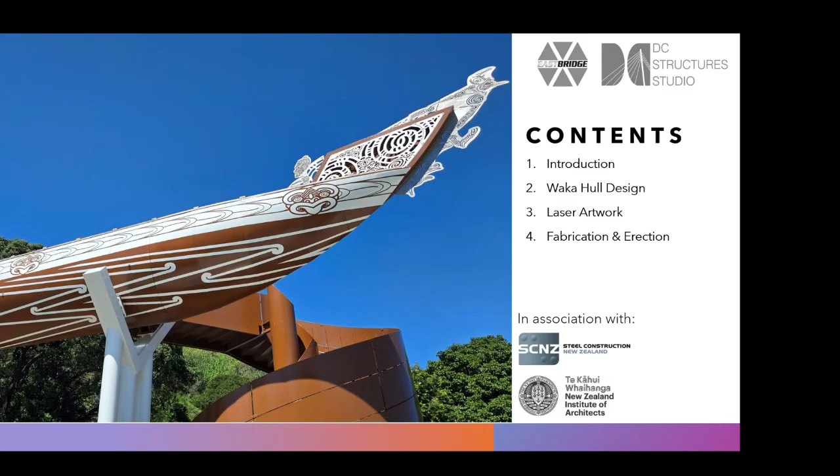And then we'll do a deep dive on some of the laser artwork and how that was accomplished, some of the challenges, some of the lessons learned so that you can use it in your own projects to advance what you're doing. And then we're going to focus on the fabrication and erection, which is a kind of behind the scenes, pulling the curtain back to see how these bridges are actually built, fabricated and assembled.

The client for this was Gisborne District Council. The iwi was Ngāti Oneone. The bridge designer was ourselves, DC Structures Studio. Constructor was Curries Construction, and steel fabrication was Eastbridge. Geotech was Riley Consultants, and we had independent peer review on the structural stuff by Hoffcon.

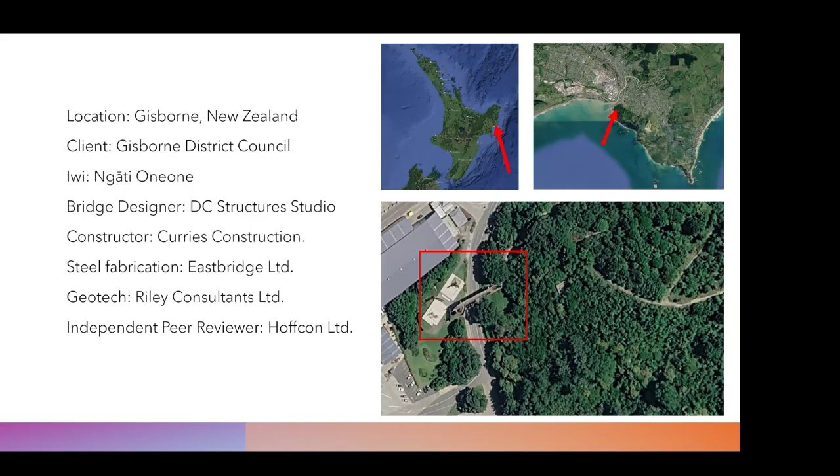So in general, the bridge location is Puhi Kai Iti Cook Landing, which we like to call the whale tail area. It's a beautiful landscape works right by the Captain Cook Monument. The project forms part of the Gisborne District Council's Tairāwhiti Navigation project, and it's a harbour frontage, so partially coastal marine. So that affected some of the corrosion considerations. As you can see, it's a very striking form.

One of the things we did very early on is engage with iwi and ask what kind of bridge they wanted. And they were very clear. They said the bridge needs to look like a waka. We don't want it to be symbolic of a waka. We don't want it to imply a waka. It needs to look and feel like a waka. Okay, so it was quite nice to get that very direct feedback. And I think they'd obviously had previous concepts that picked up some key themes of the waka, but played with it too much, and it wasn't quite what they wanted. They wanted something very literal.

As the architecture and structural team, we were very keen very early on that the best way to give integrity to that cultural identity would be to make sure that the waka itself becomes structural. We were very clear day one, we would not create a traditional bridge and clad it to look like a waka. This bridge is fully structural. You'll see in some of the later slides, it behaves like a traditional boat building form. Everything you see there, although it's the architectural outcome, is also the structural form.

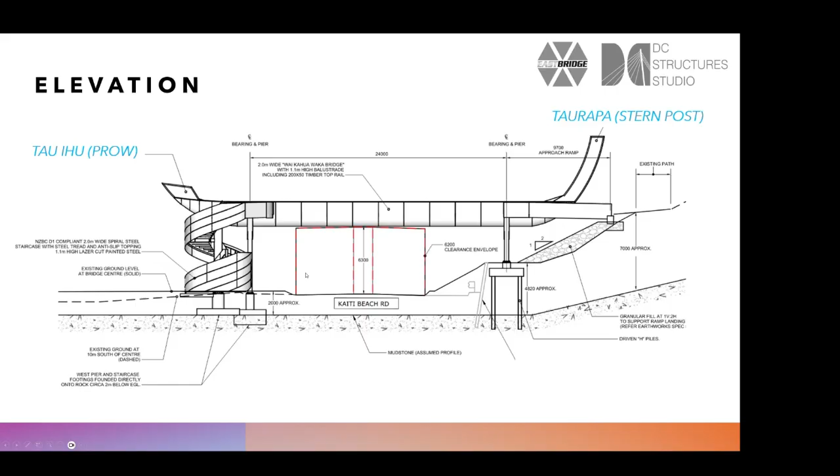Here's one of our favorite views. So in simple terms, this is a 36-meter long bridge. It's funny, it's difficult to measure the length because it tapers so much, but it is about 36 meters and the main span's 24. We've got a 2-meter usable width. So that's the width between the balustrades. It has a curved box girder main span, spiral staircase, and then we've got, just in the foreground here, this northern approach ramp that links us back to existing ground and those dock pathways.

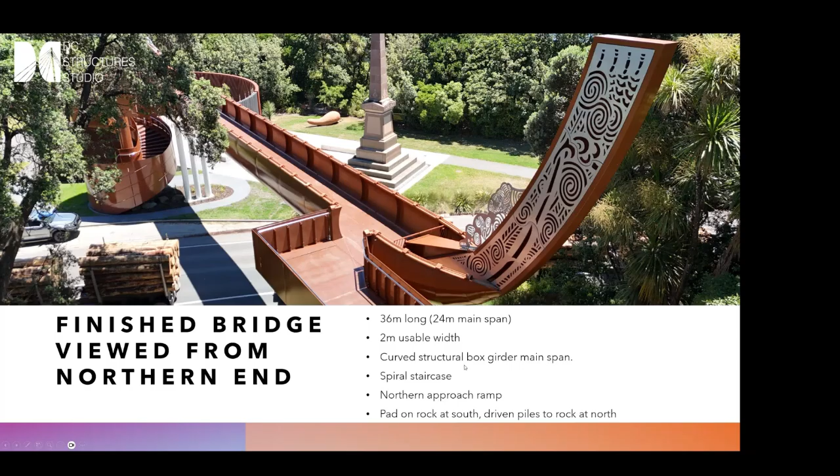So the waka hull design. So I want to focus on this because this is one of the core elements of this design, is that integration of the architectural intent with the structure, with the fabrication. So we're going to focus a little bit on the hull.

So like I say, early on, we decided we weren't going to clad a steel I-girder to look like a waka. We felt that that was creating almost a theme park ride from something that had very high structural significance. So we wanted to maintain the integrity of the intent with the integrity of the design approach.

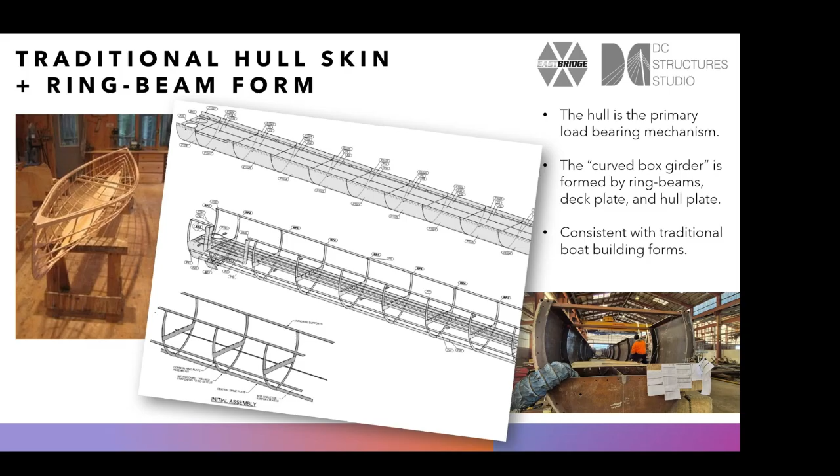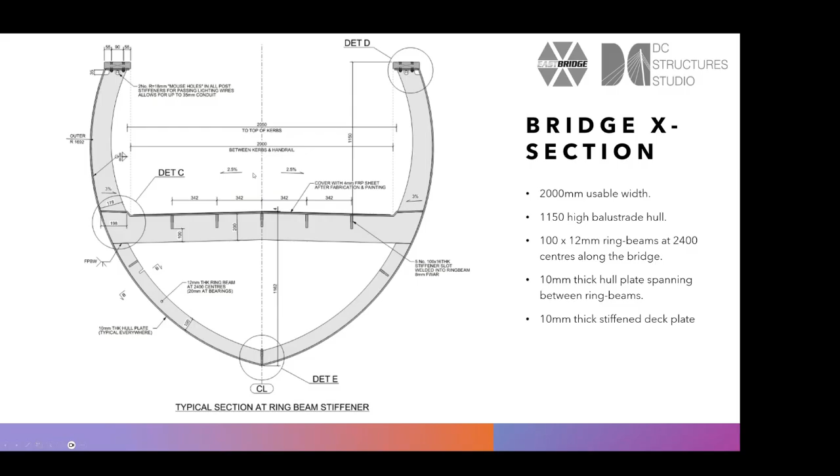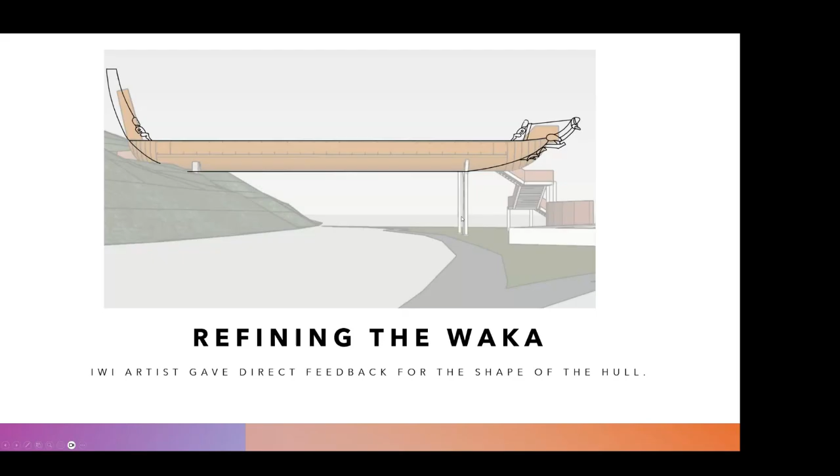So you can see it was quite a flat nose and stern, whereas now we've lengthened that tapering. It adds a lot more elegance. We obviously elongated and curved the stern board, and the prow became much higher in technical complexity, but that's part of the outcome. So working and throwing ideas back and forth with the iwi artist was really important to make sure we maintained iwi buy-in to the final outcome.

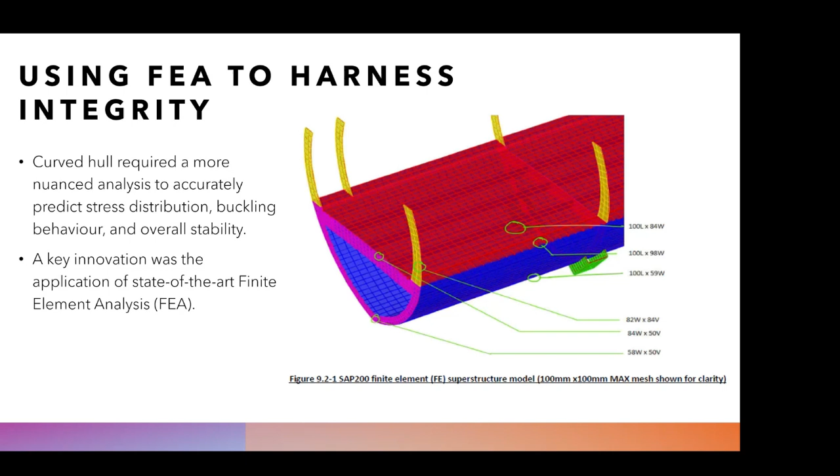What we didn't want to do is dilute the waka form to fit with a consistent box girder form. We wanted to make sure that we could take the box girder and match it to the waka. So it was the architectural intent and the cultural identity that drove the analysis, not the other way around. Here's just an example of that in action. So here we're running probably live loads on the deck, and it shows us the magnitude of stresses we get. And this in turn enables us to identify where we do and do not need stiffeners. This is quite an interesting approach, really cool, quite technical.

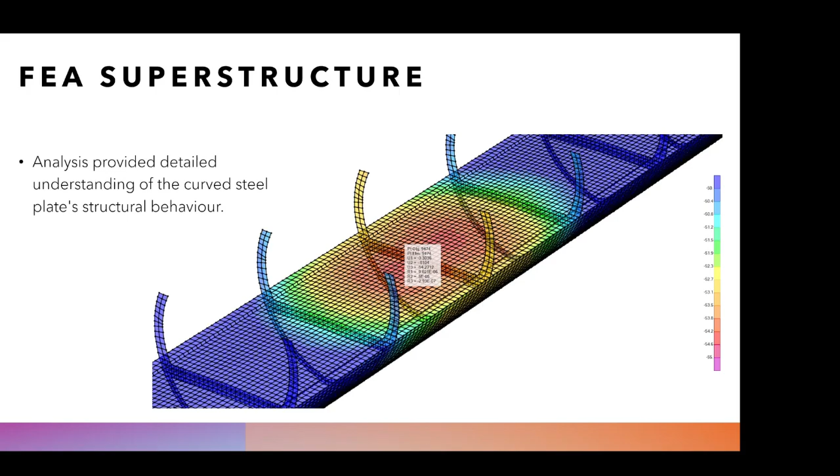We also did a dedicated one for the prow and stern areas. We had to do quite a big focus on the full-body constraints of how everything fits together so it behaves as it would behave. One of the key things with the prow and stern is we have a PFC, a parallel flange channel, running all the way around these board elements to give it stiffness and support. And you'll see in some of the later slides how that's quite important for the detailing.

But you can see some pretty sophisticated models, and this isn't actually the sophisticated version. I've printed this out at the 200 by 200 because it's the only one that can show you the squares. When we go down to the finer meshes, it's just a myriad of points.

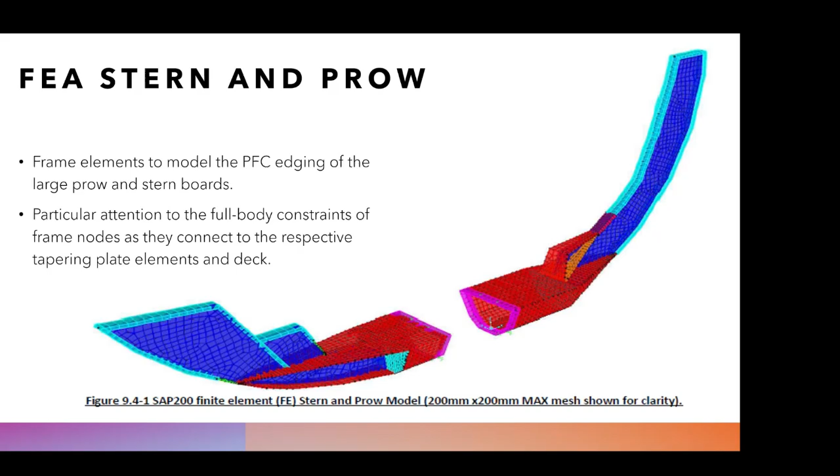So we ran numerous different versions to kind of understand the sensitivity of some of the assumptions we make, but quite fundamental to the outcome. Everything is focused on making sure the waka and its kind of architectural and cultural intent drive the structural. And it also comes on later, and you'll see in the fabrication as well.

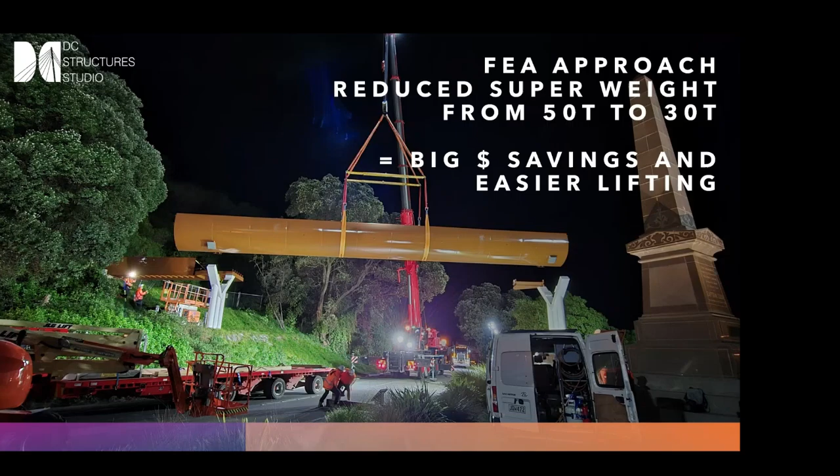Right, yeah. So the FEA approach, not only did it allow us to do something quite innovative and make sure we got the form we wanted, it allowed us to be very tuned on materials. So we originally, in pricing this works as a D&C, it was priced based on comparative detailing to other box girder structures around New Zealand. In that scenario, it should have been around 50 tons. Now, with the complex FEA, we got it down to 30 tons.

So that's a significant saving in cost, weight, materials for sustainability, but it also made the whole lifting operation that much easier. So, sophisticated analyses does add time, but if you can harness it and drive it for the right reasons, you can also get very good value. So we've got value here in terms of sustainability, material. We've got value in terms of cost savings, lifting, and also the architectural intent.

Okay, how am I doing for time?

Pretty good. So we'll move on to the laser artwork detailing. This is probably something you all come across on a more day-to-day basis. So obviously a big part of what makes the waka an interesting cultural element is the attention to detailing, particularly around the prow and the stern boards. When you look at wakas, that's where a lot of the care and the craft has been applied in that kind of detailing to show and tell the stories. So this was our primary focus here.

Now, as you can see in this image here, we've got laser cut patterns to the board area, plus around the perimeters, and there's this tiki that sits on the face of the prow board. One of the things that was really important to the overall direction of this project was understanding the assembly and constructability of these elements, trying to integrate discrete fixings. We also had to work quite closely with the lighting integration and also structural assessment.

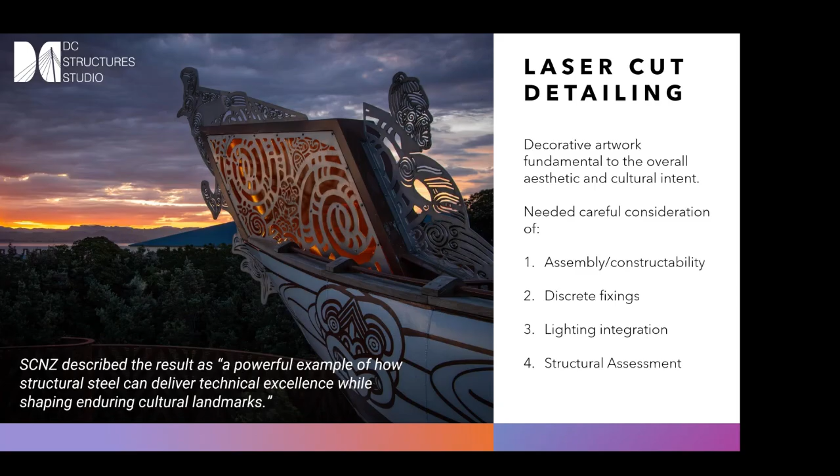So in the early days, we developed a 3D model. One of the important things we did here is we put placeholders in for the artwork. What that allowed us to do was run the overall bridge design in parallel with the artwork design, so that we weren't rushed or forced to expedite the process. We could take our time and get it carefully crafted, knowing it would fit to these kind of placeholder templates. That was quite a key decision because it bought us time and allowed everyone a bit of freedom to work with the artworks, the laser cutting, all those complexities, and the lighting. All those elements together were quite a challenge.

So you can see here one of the details. One of the things we focused on was trying to make the artwork, so the laser cutting, as simple as possible. So in practical terms, it's just a 6mm stainless steel plate. There's no welded elements to it. There's nothing other than drilled holes for fixings, and it's just a flat plate put through the CNC to be cut. So working through how that attaches to the structure without having to add kind of cleats and fixings and all those other kind of processes was quite important.

So here we've got, this is kind of half of a PFC, so a parallel flange channel. This runs the perimeter of the prow board and the perimeter of the stern board. What that allows is it allows us to have this central stiffening plate, which does the structural work, but then it creates this void. What that void allows us to do is when we have the laser cutting, in daytime, it creates a beautiful negative detail. And in the nighttime, it creates an area to install the lighting. You'll see that in a second.

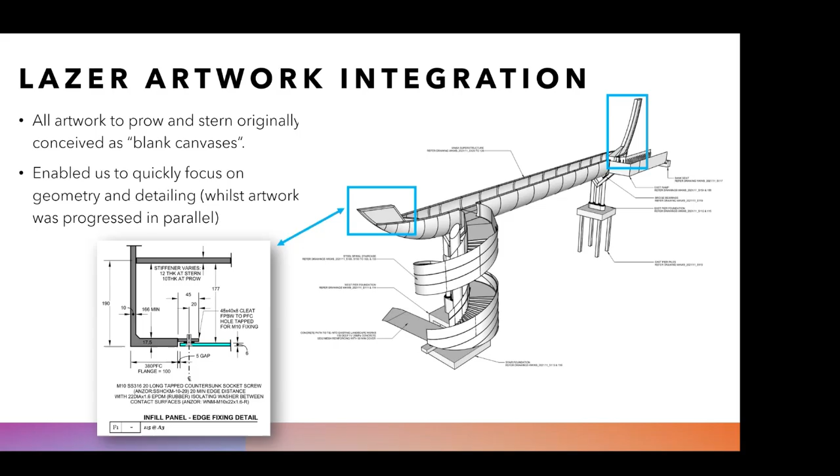And you can see here, the fixings are very simple. It's just, I think that's a stainless steel tech screw, isolated with a rubber washer, and all of the hard work is done by the structural steel. So there's a cleat to receive it. The structural steel is pushing away to create those voids, but the laser cutting is kept as simple as possible. And you'll see that in some of David's later slides, that the laser cutting was a flat panel, and that helped everything. And keeping it at 6 mil was really important.

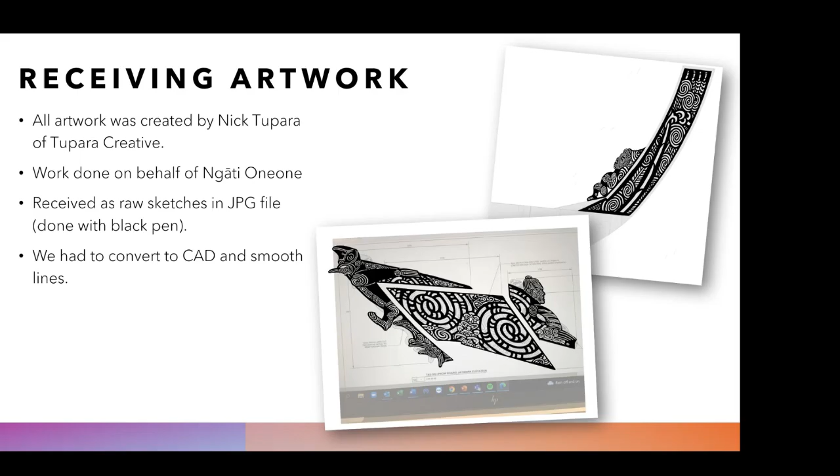Now, how did we receive the artwork? So we had those flat panels that we passed to the artist, and then the artist sketched for us what he wanted. Now, I've got to be honest, it was an actual sketch. So we tried to convert that to CAD, but the problem is it picks up all the nuances of actually a sketch detail. And you'll see that in the next slide. So when we actually created raw CAD from the sketches, we had all these crazy little bumps and curls and gnarls. So we did have to do a sanity check and go back through the CAD and just take out some of the craziest sketchy elements.

You see on the right here, there's quite a few almost sawtooths. That's literally the placement of the thick black pen that was used. And as you press down, it just creates local blotching, and it was picked up in the conversion. We didn't change all of that. So the final artwork is very much the raw sketch from the iwi artist. We just tuned some areas where those little nuances might have been a bit too overpowering.

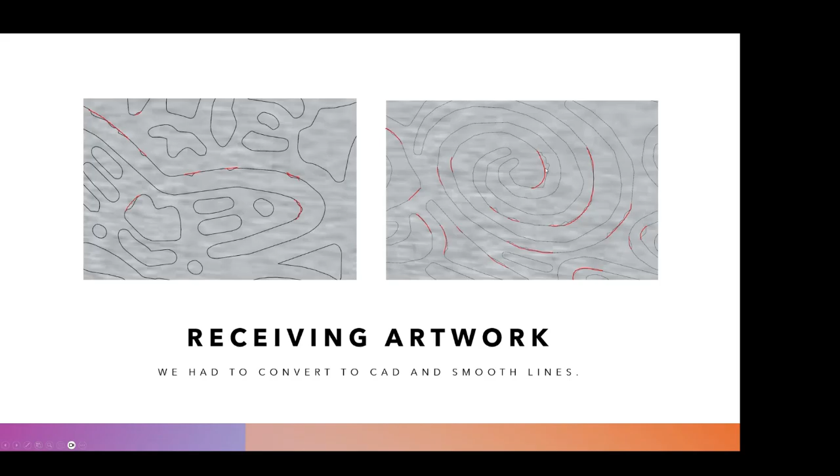Once that was done, we had a CAD file that we could then put back through our 3D modeling and put them back into those placeholders. So in the meantime, the entire bridge and the piers and the foundation, they've all been designed in parallel. But knowing in advance what those canvases were in terms of size meant once they were detailed, you could fit straight in. And you can see here, this was the intention, and you'll see in some of the later ones, it's exactly what was delivered because the process was right.

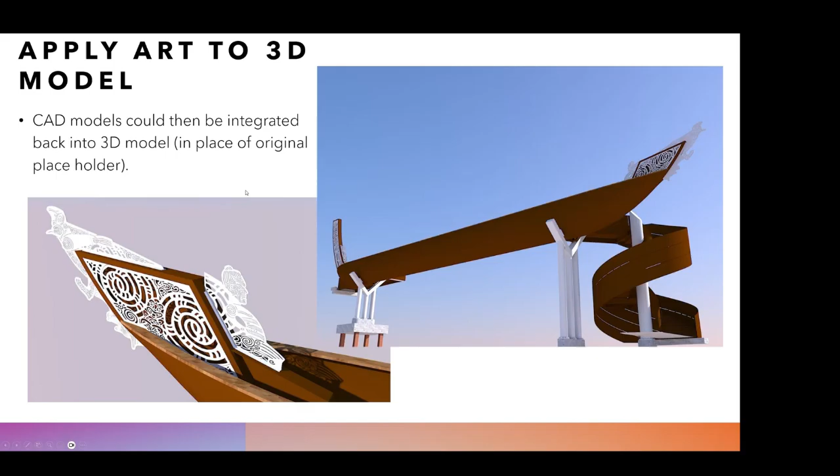One of the things obviously we struggle with, and I've talked about earlier, is wind and just people swinging on it, pushing it, feeling like they need to challenge it in the field. We've all done it. You walk up to something and sometimes you'll give it a nudge, you'll give it a push just to see what it's about. So we had to make sure that this thing was robust, but we didn't want to just chuck material at it.

So one of the processes we created is we put the artwork into CAD. We then developed a bespoke, I guess you would call it an application or an app, that took the CAD and changed it quickly into an FEA model. So it actually goes through the CAD and works out what is solid space, what is blank space, and builds a model. Okay, so you can see here, this is from our Monganui Gorge Bridge. That's the balustrade infill. But here's the tiki from the Waka Bridge that we used it on as well.

And that then goes on for us to look specifically at the areas that might be struggling. Now, obviously, with these intricate patterns, it's normally in the regions where the pattern's reducing to such an extent that it creates like a bottleneck. So you can see here, we had some areas here, but there was a particular bottleneck through here that needed analysis.

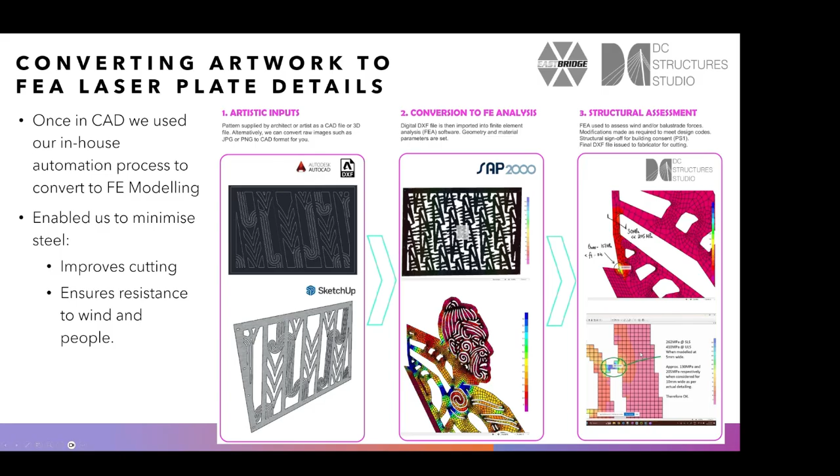And, you know, this is pretty unusual. We've got a full FEA model of the architectural tiki just to make sure it could do its job freestanding without becoming 10 mil, 12 mil plate. You know, we could keep it at the 6 mil plate because we could prove it. You don't want to find out after the fact that 6 mil is wobbly as hell. So this is where this adds value.

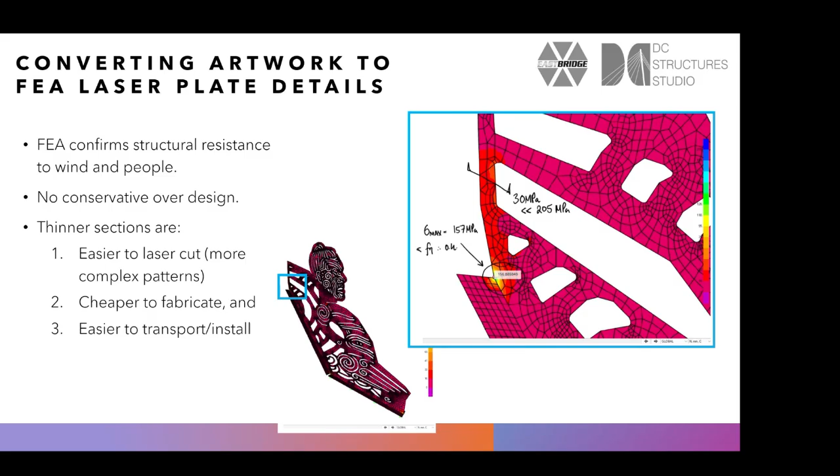It allows us to hedge our bets in terms of we can go thin plate, which, like David will talk about later, thin plate is easier to cut. Okay, by going as thin as possible with proven analysis, it opens the gateway for a nice, complex, intricate pattern that adds a lot of value.

The detailing, so you can see here, this brown kind of framing element, this is the PFC. So you can see here in the top right-hand corner, this is symmetrical, but half the PFC stands proud of this central board. So you see here the brown background, the negative detail, that's this central board. And then the framing is the PFC coming over the top with these cleats to receive the artwork.

And here, what this detail is showing is we used an INEOS Eon Flex Pro flexible LED system. That allowed us to kind of go up the inside of the PFC and get this whole area lit. Now, the flexible INEOS was more about the stern, because the stern's actually a curved shape rather than the more straight shapes of the prow.

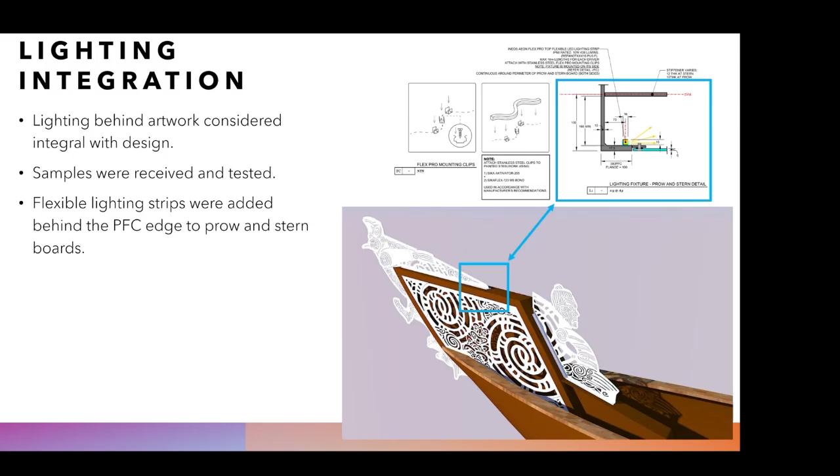But again, considering how we integrate the lighting, how we get the negative details, how we get the fixing, is really important. And that's probably one of the strongest elements of the Waka Bridge, that awareness of what we want to do architecturally, culturally, with the intent, and making sure the details are considered from an early phase so everything comes together seamlessly is quite important.

Here's a version of the lighting. So we do have under handrail lighting, more of a functional lighting, and that also comes down the staircase. And then we've got the architectural lighting to the prow and the sternboard. I mean, the sternboard is massive. It's like 8 meters tall. I think it's like 1,500 mil deep. It's huge. This probably doesn't give it the scale of its actual outcome.

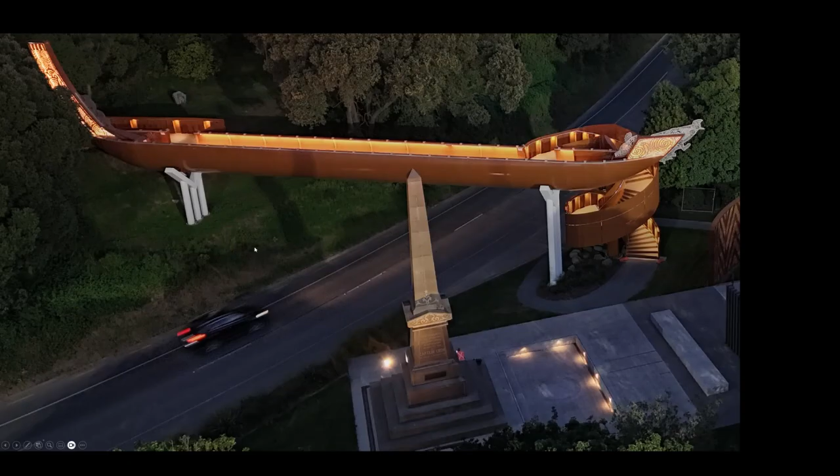But you can see that lighting has done its job. It lights all the way through that negative space. And we had quite a few mock-ups in the office, quite a few days where we had to black out all the windows and get the lighting to see if this would do the job. And obviously it did. So that's a great outcome.

Also, a really important consideration was around parts and assembly. Like I say, this overall sternboard is huge, so it wouldn't be practical to have this as one laser cut element. We had to work through, well, what are the stainless steel sheets available to us? So this is probably an important lesson to learn when you're doing detailing with this. Start from what are your sheet sizes? What can practically be sourced and supplied within New Zealand? And then work backwards, because that will define your assembly segments.

Okay, so you can see here, even on our drawings, we explain what parts and what sheets we're expecting these to be cut from. So you can see this panel number 2 was cut from a 3 by 1.5 panel, whereas number 3 was from a 2.4 by 1.2. So having awareness of available sheet sizes and then working through your assembly is really important.

We also played a little bit with the sections. Rather than having a straight cut, we created a bit of a fun shape with the cutting itself, and that added quite a lot of value. Rather than trying to hide the cut, which was almost impossible without adding complexity, we tried to create a bit of fun with it. So in terms of the panels, you've got these cut edges, and we've also got these holes. These holes are your fixing points onto those cleats I showed you earlier. So overall, this was quite a fundamental drawing. This is the stern plate detailing drawing that shows the plate assemblies and shows how they attach.

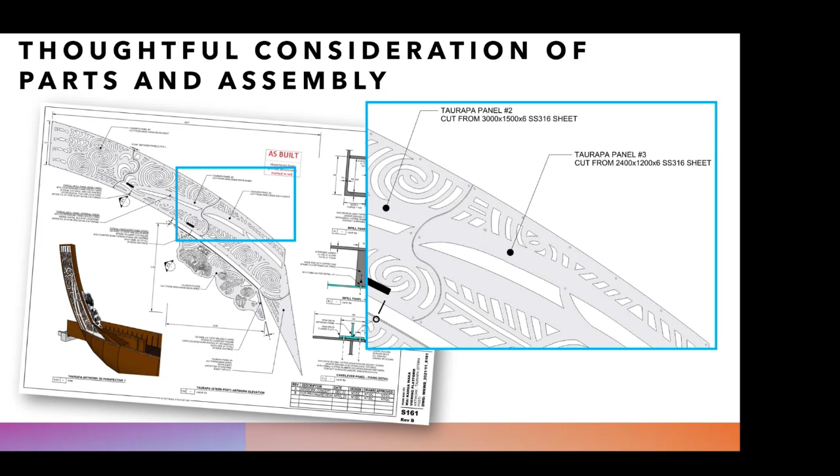And obviously the DXF file, so the raw CAD file, was then sent to the fabrication team so they can plug it straight into the CNC machine. So a very kind of smooth, quite easy process, because we all thought about the process in advance and decided what we wanted to get from the process.

It's a stainless steel mech fixing on a stainless steel plate. You have to look hard to find it. It's one of the things, once you find them, you can't not find them, but typically people don't see them. But we find the assembly cuts to be quite playful and actually a really good outcome.

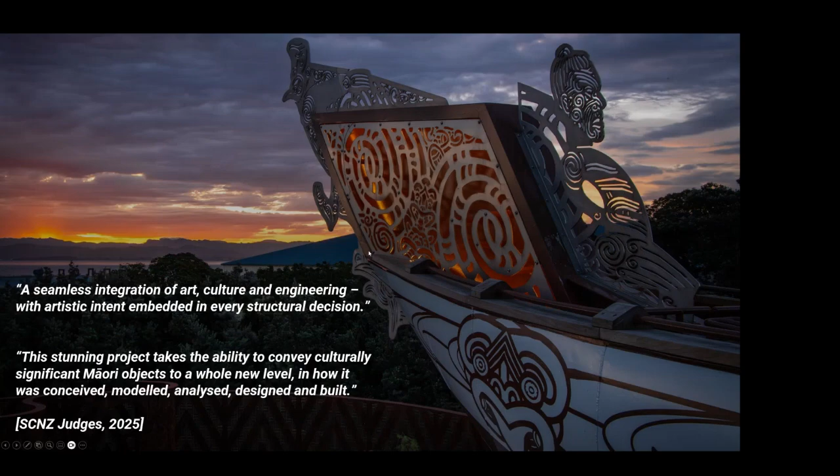Obviously, it's done well at the SCNZ Awards. Seamless integration of art, culture, and engineering, which is basically the purpose of today's meeting. The artistic intent embedded in every structural decision. And that's really the key message here, that we haven't created a bridge and then clad it to look like a waka. Everything has been woven together into one outcome. And I think if you can get that in your projects, the outcomes speak for themselves.

Okay, that's all I'm going to talk about today. I'm happy to take questions as we come on to the end of the session. I'm going to hand over to David now, who's going to talk through fabrication and erection. Yep, thanks very much for that, Dan.

Dan, to his credit, is very in tune with the requirements of the fabricator, and he's had a bit of a relationship with Eastbridge, so he's quite good at knowing what does and doesn't work from a fabrication point of view, which did make this project a lot easier.

I think one thing that I would say that facilitated this project is we had a very tight collaboration between Dan, the designer, Eastbridge, the fabricator, and another chap, Andrew Fletcher, who is our detailer. So slightly unique to this project, Eastbridge engaged both Dan and the detailer directly. So we had a very small circular relationship right from the inception of this project. So the fabricator was heavily involved. And I think it shouldn't be underestimated the benefits that added to the project.

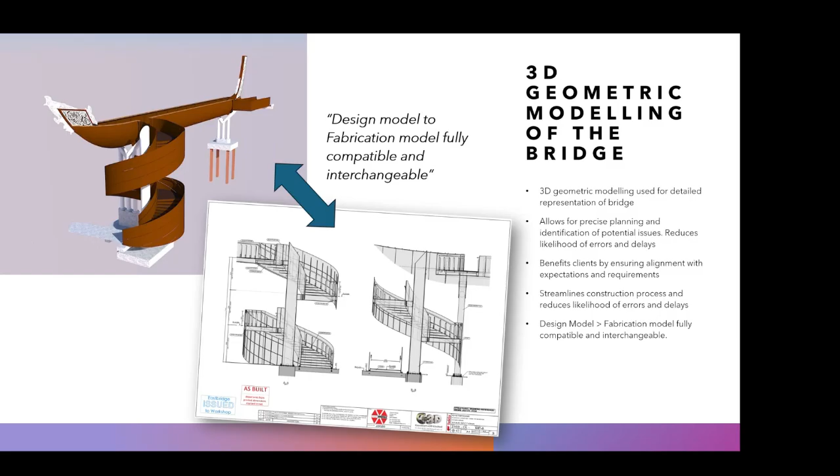And I think the main benefit, which you'll see on the next slide, thanks Dan, is that the renderings that were produced by that collaboration at the start very much have borne out in the end product. I mean, what Dan conveyed to the stakeholders is what was delivered in very tight alignment. I think that collaboration shouldn't be underestimated, and it's quite worthwhile going forward.

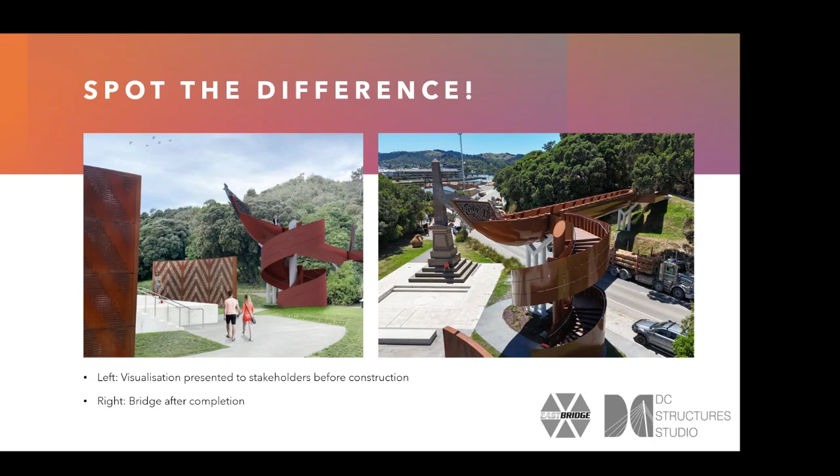Like in a usual construction arrangement, there might be 3 or 4 layers of separation between the architects or the designers and the detailer, but in this case there's a very tight relationship, which I think the images here show how easy it was for us to produce what Dan conceived of at the start of the project through that collaboration. Next slide, please.

Because the various elements of the works all had some quite unique geometry, we did actually rely heavily on having a very high quality set of steelwork fabrication drawings, which are indicative here. Bearing in mind that all steel starts as flat plates, there was a lot of work involved in that geometry and taking those flat plates and turning them into flat patterns that we could manipulate. So we needed to have the good information to start off on the right foot.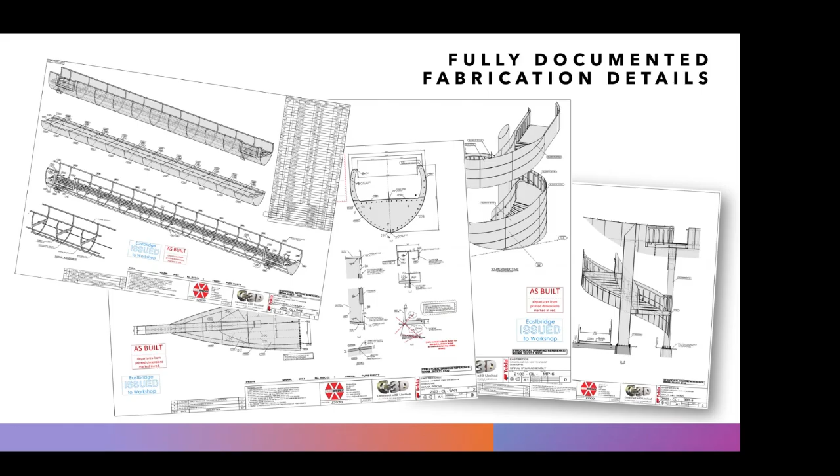Next slide. Thanks, Dan. The next part of the puzzle for us was we had a very good set of drawings to start with, but actually we needed a very good and skilled crew of fabricators to produce some of this complex geometry. So it took a lot of skilled fabricators and a very methodical approach to execute this.

This image here, you can see the hull itself. Geometrically, it's reasonably simple. It's only a constant radius curve, that hull, so it's not overly complicated. So that was manageable. But if you look at the next slide, thanks, Dan, you'll see that the prow and the stern elements take another step up in terms of the complexity. Another definitely higher notch of complexity.

Both the prow and the stern, in this image you can see the stern, those skin plates are structural elements, as is the hull, and they're about 10 millimeters thick, all those steel plates. So those plates aren't just 2-dimensional curves, they're actually 3-dimensional compound curves, which are certainly quite challenging to manage and fabricate. But again, that just came down to a methodical approach from the guys, and some very highly skilled guys doing that work as well. So we really relied on the experience of the fabricators to produce this geometry. Next slide, thanks.

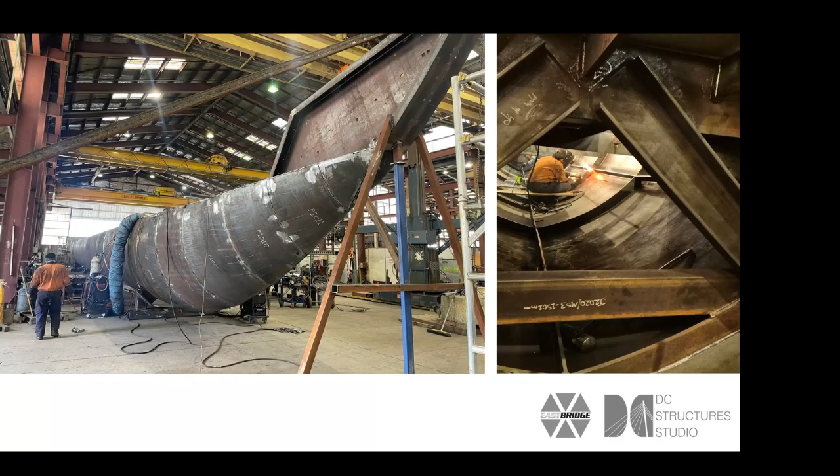One of the things that cropped up quite early in the process was how we were going to treat the welds on the outside of the hull. So it would be very easy, and I think we all anticipated that we would be grinding all the welds flush, as would probably be expected, but we actually took a different stance on this. Once we started welding, we consciously decided or suggested that we'd leave them proud, and that left photo is actually a mock-up we did. We welded a section of the hull, sent that through to Dan to have a look at and to consider, and then we just decided we'd actually leave the welds proud.

And the main reason for that was actually aesthetic considerations, which might sound counterintuitive, but the real risk we had with such a long flat structure like the hull you can see on the right is we get this cupping or oil canning effect where when you're welding down those seams, the heat sort of bows the plate inwards. So if we had ground those welds flush, we would have this series of cups along the hull, which we thought would probably be not very desirable. So we ended up leaving those proud, and I think that has made a big difference. It really masks the oil canning cupping effect.

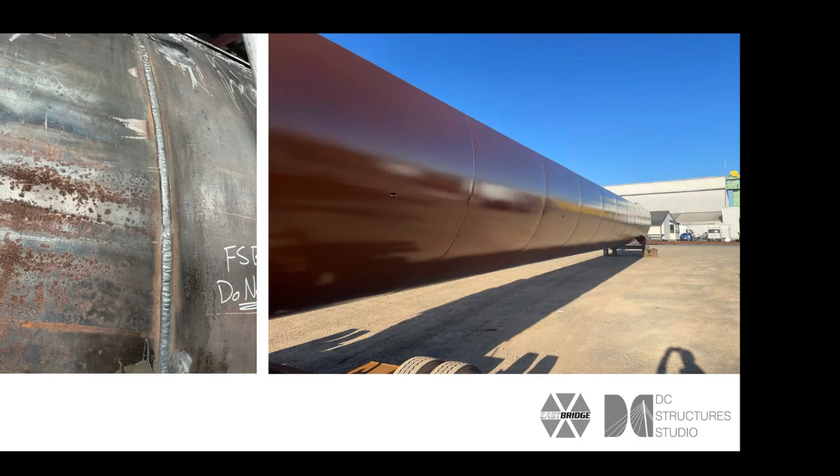And the justification for leaving those welds is also we wanted to display some of the workmanship of the fabricators, have that visible so people could appreciate that it was humans that built this. And it's easy to justify because if you look at a traditional waka, you can clearly see the craftsmanship and the workmanship and the evidence of it on a traditional waka. So we sort of just mimic that and honour that by leaving some of this workmanship visible on the project. Next one, thanks, Dan.

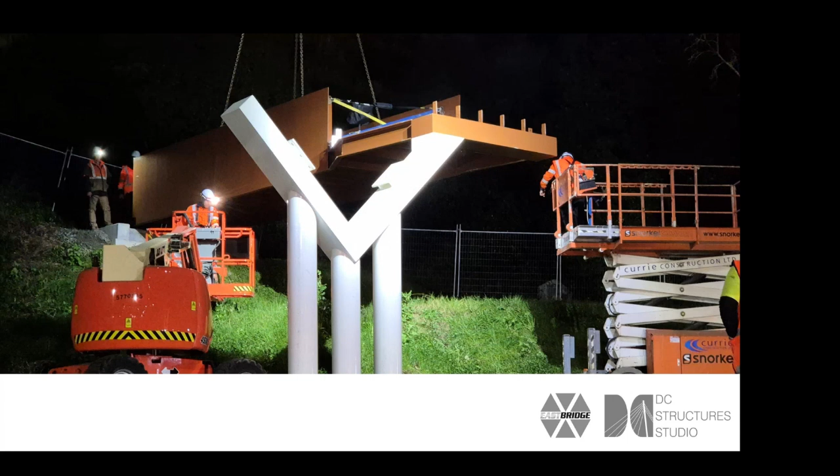Which is challenging in itself, but the team did a good job there. Next one, thanks, Dan. Yeah, so not too much to see here, but that's the approach ramp on the Kaiti Hill side of the structure. Also designed as a sub-element that was easy to fabricate, install, transport.

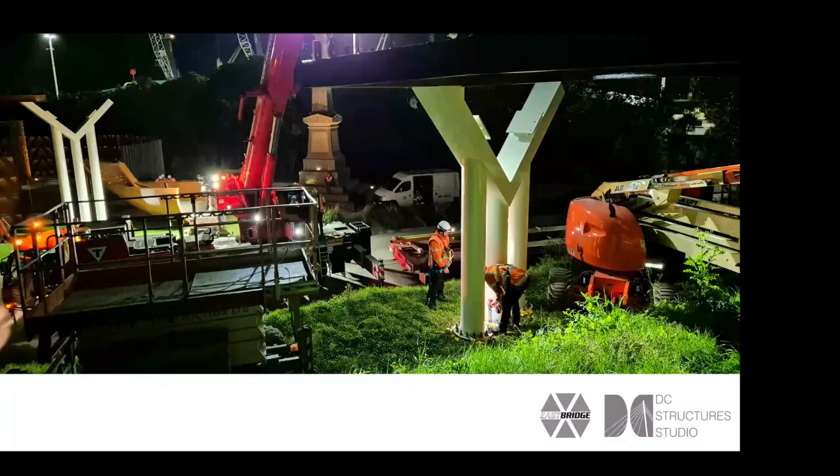Moving on, thanks, Dan. Similar again, it's just an installation. You can see quite a straightforward, simple bearing arrangement on this, which was useful. You can see the prow just in the background there, ready to be installed. Moving along, thanks, Dan.

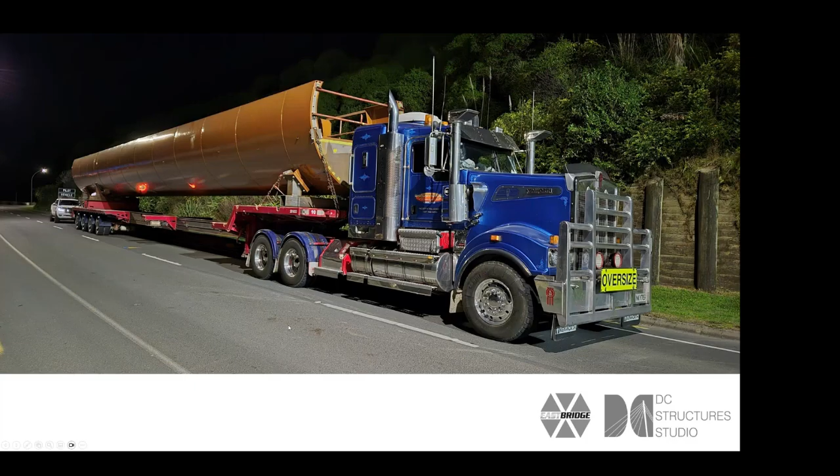So one of the key things for the ease of installation of this was splitting the hull into three substructures. First one being the main hull, as can be seen here, as well as the prow and stern sections separately. So splitting the three vessels was primarily governed by transportation requirements, particularly with the stern being such a tall element.

It actually became very relevant for us because we started the project before Cyclone Gabrielle, and part way through, Cyclone Gabrielle affected us quite badly, and that affected the road conditions between Napier and Gisborne. So fortunately, we had designed it in such a manner that it was easy to transport, because the transportation logistics became substantially more difficult. Next slide, thanks, Dan.

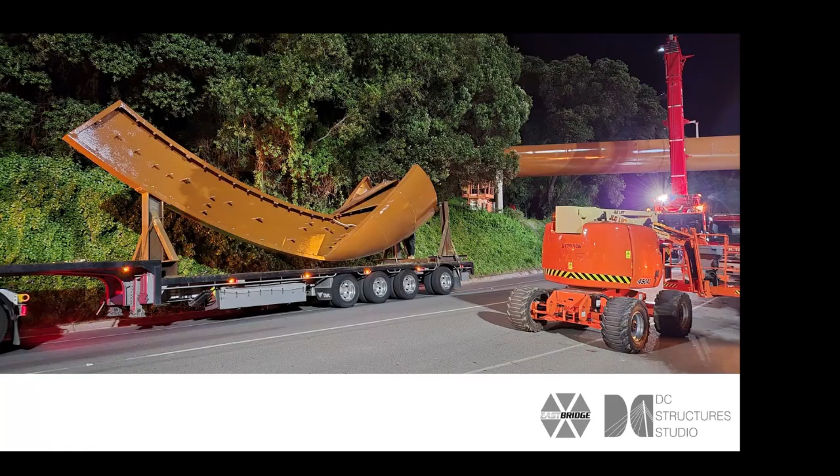Yeah, so this again was one of the main reasons we split the structure into three elements, because the stern section here, as you can see, is quite substantially large, and would have been virtually impossible to transport in another state. There were considerations about splitting this into sections again and site welding it, but eventually we just settled on raking it over like that and transporting it in one piece.

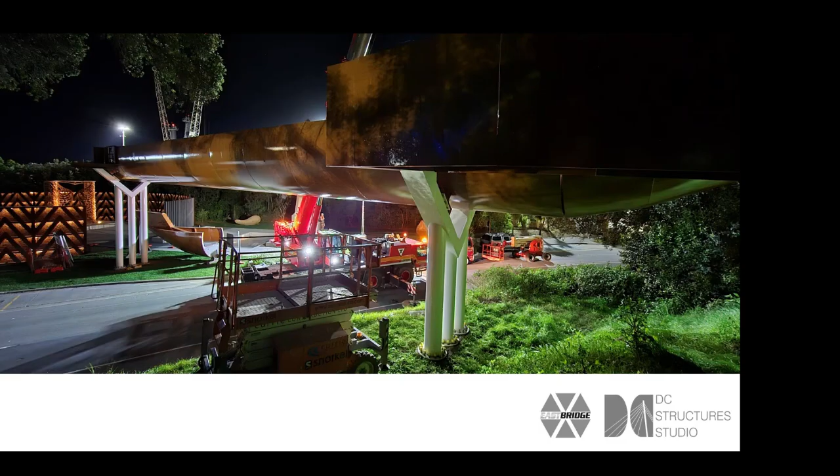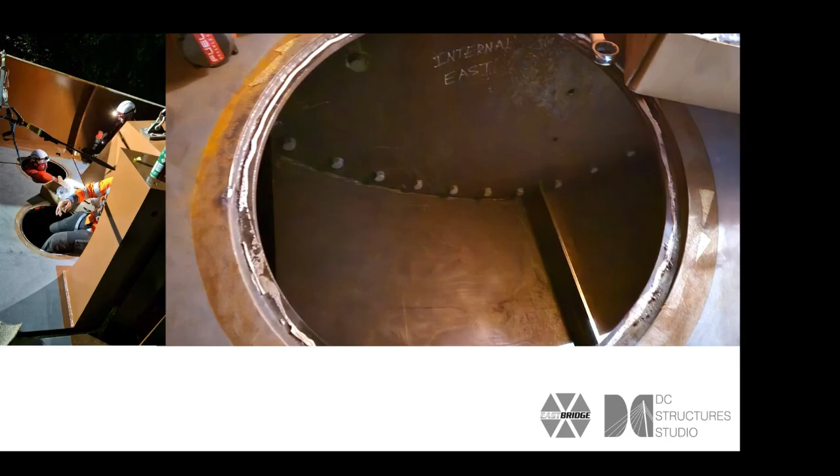So I think for us, it would have been very easy for Dan to determine that the easiest path forward was to site weld these three portions on site, which is an easy decision to make because there is no design input to having a welded connection, but there was a lot of time and effort put into the bolted connection, which was extremely advantageous for us for a number of reasons.

You can see here, the connection was designed in such a way that it's virtually indistinguishable from outside the vessel, which I think is the key outcome. But there was a lot of thought put into how that connection came to pass. So to connect it, we did require having holes in the structural steel floor element. You can see the two holes on the left of the image here to provide us access inside.

The prow and the stern sections actually had no internal access at all. So those sections were produced with a type of nut welded to the inside face, so we didn't need the access. And then on the night of installation, it was a very, very quick and easy process to bolt that up. Literally two to three hours, those connections were made on site each night, which alleviated a lot of the site

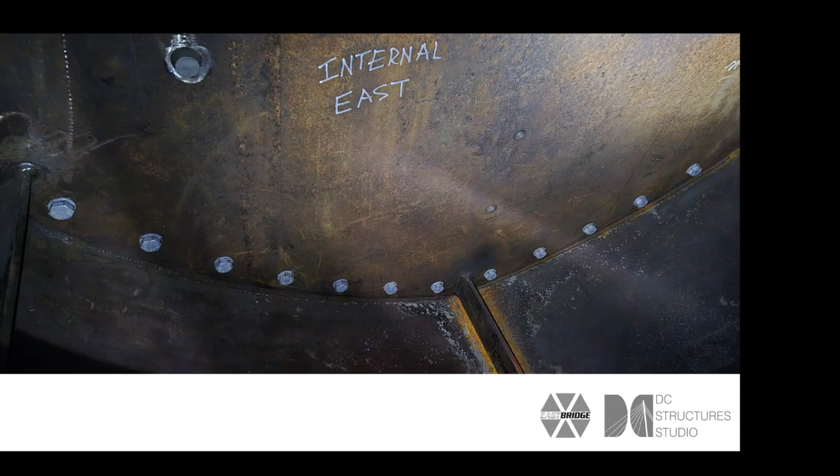constraints. It meant we didn't have to have any temporary works for supporting those prow and stern sections while they may have been welded together. Took out all the site welding and all the risks associated with that. So the design of that was exceptionally good and exceptionally functional and straightforward. Next slide, thanks, Dan. I think you skipped one there.

Yeah, that's just a bit of a detail on the inside, which doesn't show much, but it does show some of the alignment dowels we used to facilitate joining the two halves on site. But yeah, good solution and pretty well thought out, thanks. Next slide.

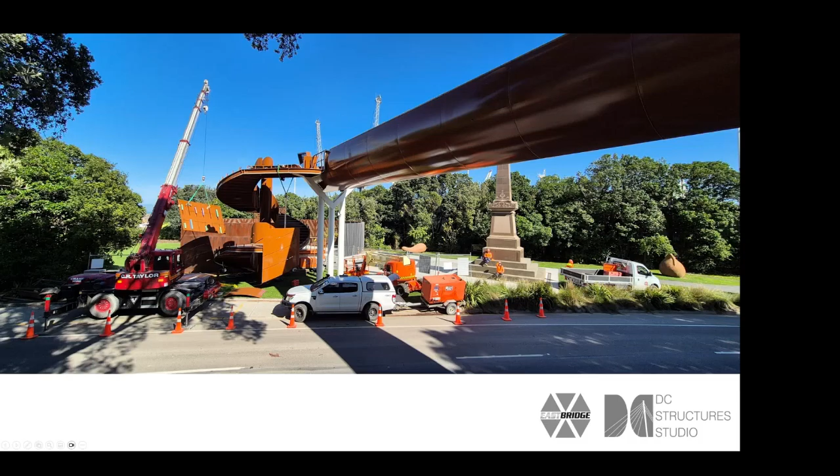Yeah, so that's just coming closer to the finish line. Obviously, the staircase did come up in a lot of sub-assemblies, which took three, four or five days to assemble on site, but that went quite smoothly.

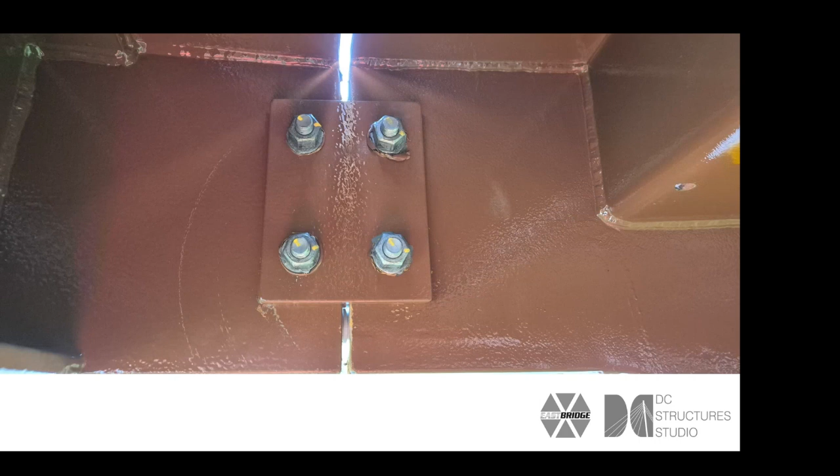Next slide, thanks, Dan. Yeah, just a bit of a detail of how some of those internal connections were made. So all the shrouding system fixings were virtually indistinguishable from the outside. We did have splice plates on the inside to connect everything. So there's a lot of thought put into hiding the fixings and making the external structure as clean as possible.

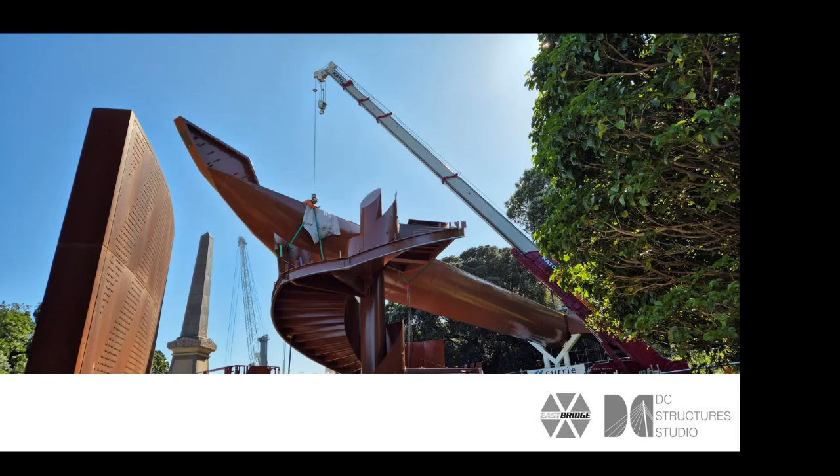Next slide, thanks. Yeah, that's just another example of the elements going together. So I think Dan might correct me on this, but there's some existing structures in and around that area which were made from Corten weathering steel. So that structure you can see on the left there is a weathering steel structure. And I believe that we colour matched the hue. And I think Dan went to site and held some swatches up against that to actually select the shade of paint we've got on the structure. So the structure is painted steel rather than weathering steel.

And there is a specific reason for that. I think it's because it's over the road and there was... No, consideration. We were too coastal. So if you have a weathering steel in a coastal environment, it degrades too quickly. It doesn't create that patina. So we would have had to go for marine grade weathering steel, which would have just blown the budget. Now, it's okay for the sculptural works because they're non-load bearing, but as soon as we went to something structural, we couldn't risk the long-term durability issues. So that's what drove the decision not to go with weathering steel, but instead match.

Yep, it makes perfect sense actually, doesn't it? Because one's structural, one's non-structural. Yep, next slide, thanks.

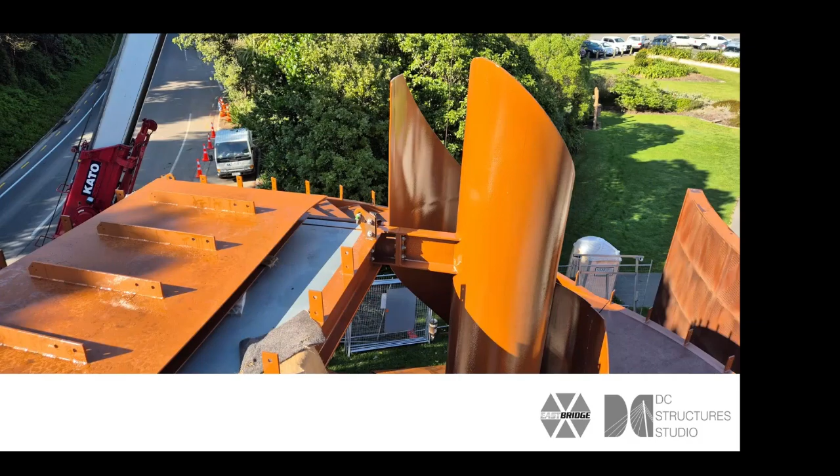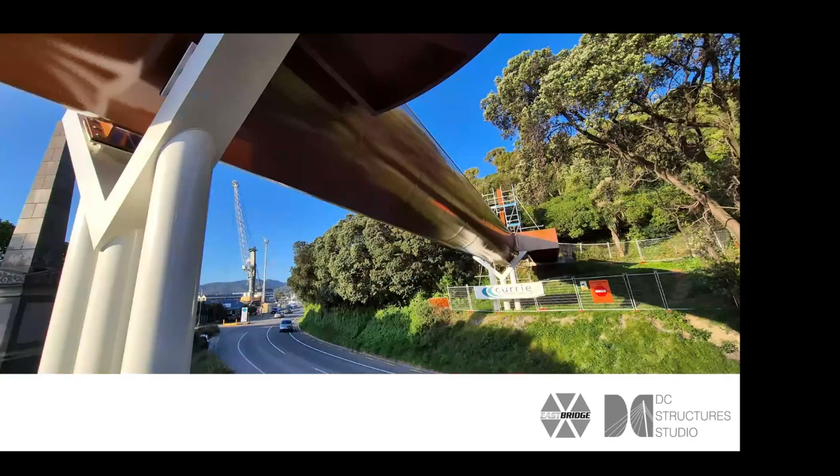There's just a few more examples of the modular nature of everything and the site assembly process. I think us building the staircase in the workshop in full made the site installation period substantially shorter. It's definitely advantageous to have it built in the workshop. There were a few issues which the trial assembly in the workshop did raise, which just reinforced the reason for doing the full assembly in the workshop, because we were able to troubleshoot a few issues. And the only troubleshooting was related to the circular shroud plates and managing their alignment on site. So we added some extra features to make sure they were aligned and had clean, tidy transitions between the circular shroud.

This one must be near complete. And I think in this photo, what's probably interesting to note is you virtually cannot tell where the spliced connection is. In this photo, actually, the spliced connection is where Dan's cursor is now, one bay to the right of the pier. I mean, unless someone pointed it out to you, I don't think anyone would actually ever see that spliced connection. And I think that's a credit to the design and the execution that we were able to put that structure together and not have any distinguishable assembly marks.

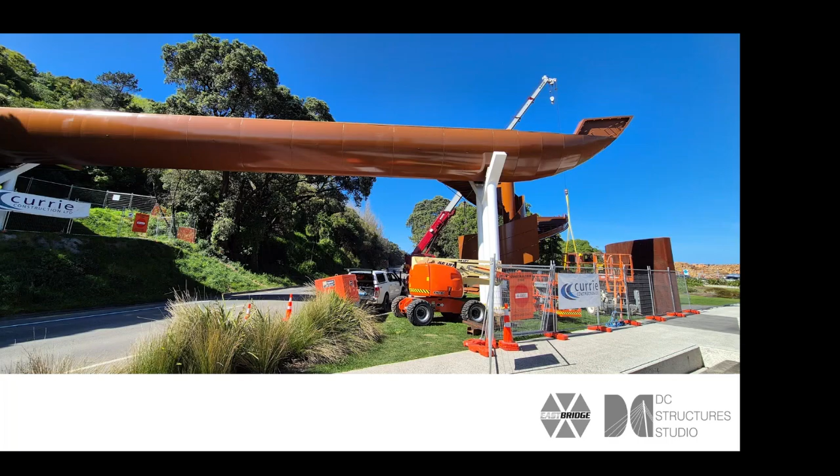And I think Dan has already talked about it, but I think it should be reiterated how easy and cost effective this artwork's implementation became on the project. So this project was constrained commercially, and so there was a lot of conscious decisions around how to do things cost effectively. And I think the inclusion of the stainless steel artwork, which was a secondary budgeting issue, was remarkably cost effective. The reason this photo is included is you can see on the left, this panel is exactly how it's come off the laser cutter's bed. Literally, it came straight off the laser cutter's bed, no human involvement. That went straight to site. All that we did was peel off the adhesive protective sticker and bolt it straight on. You couldn't have done it more efficiently.

And I think people are sometimes swayed away from stainless steel because of the raw material costs, but yes, the raw material costs might be 5 or 6 times the cost of a carbon steel plate, but if you'd had to take the same equivalent carbon steel plate and put it through a painting process and all the handling and extra requirements to paint steel, you'd quickly erode those gains that you'd made by using stainless steel. So stainless steel at face value is quite expensive, but ultimately on this project we utilized it in such a way that it was highly efficient and achieved the outcome at a very low cost. So I think that was definitely a good addition.

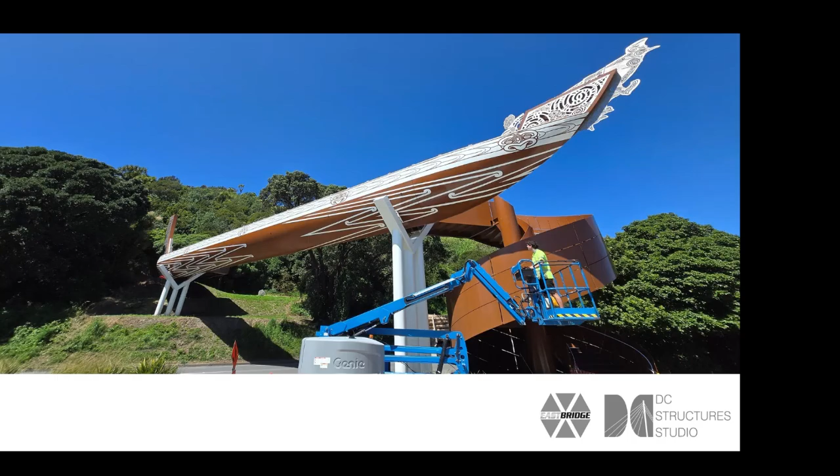And essentially, that is the end product. I think this was a few days before it was open to the public, so that was in its final state. And I can't say much other than just a pretty good outcome. Fabrication team, the design team, collaboration between Dan and our detailer and our team. I mean, speaks for itself, I think.